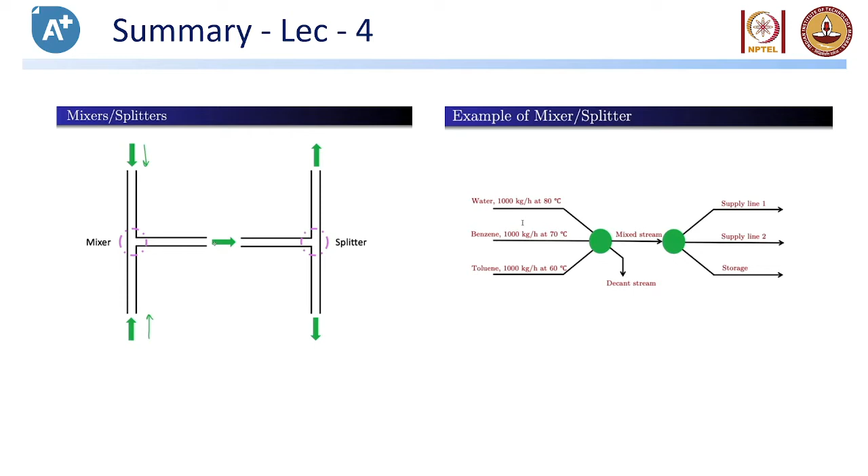So we'll go in details when we talk about thermodynamics of reactors, right? And the next example which the professor discussed is about flash. So we can discuss one more example over here. In the case where the professor explained the flash calculations, he took the example of naphthalene, toluene and water, right? So we'll just simplify it.

So if I have a binary system, let's say a mixture of nitrogen and oxygen, it's a simple example, right? Air, neglecting argon. So if I take a nitrogen and oxygen 50-50% feed, and I'm sending it to a flash splitter at, let's say, 100 Kelvin and 10 bar, what composition would you expect to be in the vapor phase and liquid phase?

Will it be the same composition as the feed? Let's talk with respect to nitrogen. In the feed I'm saying nitrogen is 50%. Now what is the composition of nitrogen in vapor? Will it be more than 50%, less than 50%, or equal to 50%? I'm doing a flash calculation at 100 Kelvin and 10 bar. I took it as an example. All right. So any response?

Could you get the question? First asking before asking the answer. All of you, could you understand the question, or shall I repeat it? Yes, okay. See, I have a feed which has a mixture of nitrogen and oxygen. My feed composition is 50% nitrogen and 50% oxygen. Now I'm saying this feed is at 100 Kelvin and 10 bar.

Any response? The vapor phase is at which pressure? Okay, we are neglecting the pressure drop in the flash column. For example, the feed is at 10 bar, and I want the vapor also at 10 bar. Or let's say we are expanding it and then separating it. Vapor is at 1 bar and my feed is at 10 bar.

So one response says it depends on the K values of O2 and N2. Yes, that's a good response. Less than 50%. Okay. So could you please explain how you are guessing that it's less than 50%, Mr. Akshay? Or the people who said it's higher, just out of curiosity, how could you tell straight away? Because one of your friends says it depends on K values of O2 and N2. So irrespective of the K value, how could you just say that?

Another person says it depends on how much pressure we want. If you're talking about pressure, it's an indirect way of mentioning the equilibrium constant. Both are related, so it's indirectly the same response. Okay, bubble point of nitrogen. See, when you're talking about a pure fluid, you call it boiling point. There's no bubble point and dew point for a pure fluid. When you're talking about a mixture, you get a bubble point and dew point. So for nitrogen, you can say boiling point, not bubble point.

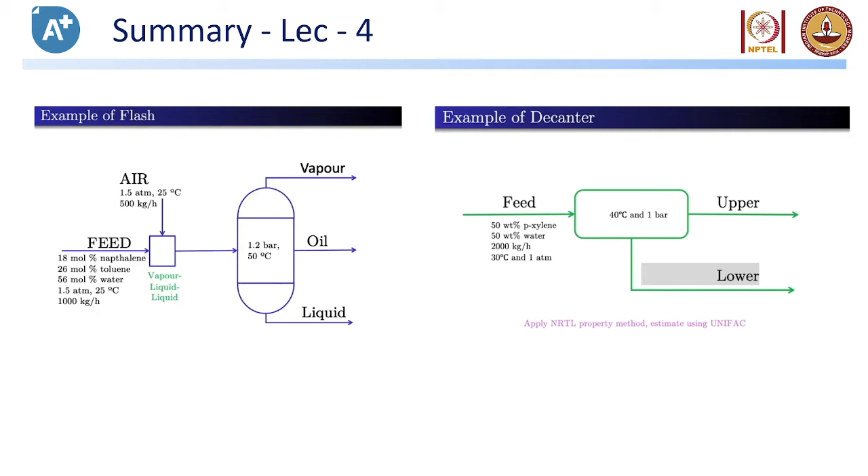Now the fourth one which the professor explained is the decanter. A decanter is basically used for separating an LLE split. If you have a liquid split, then a decanter is usually used. It's the same as the flash separator. In flash you have VLE, whereas in decanter you have LLE. It's the same thing. Thermodynamics remains the same.

Next he explained about the heat exchanger, a simple heater, cooler, and a combination of both. And then he came to the multi-stream heat exchanger. These multi-stream heat exchangers are quite used in the LNG process. So what is the difference between a simple heat exchanger and MHeatX? In a multi-stream heat exchanger, you have multiple cold and hot streams, so it can accommodate n number of hot streams and n number of cold streams. As we progress in this course, we'll solve a lot of optimization problems and process design with respect to multi-stream heat exchangers, and we'll discuss more about pinch analysis in future.

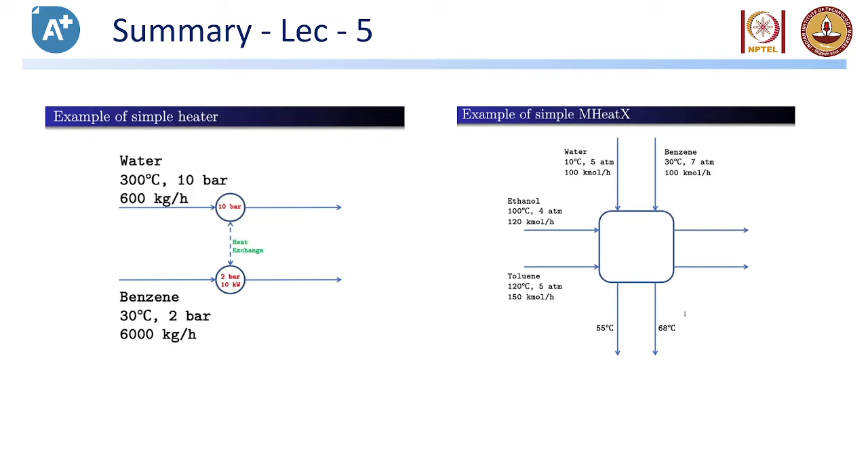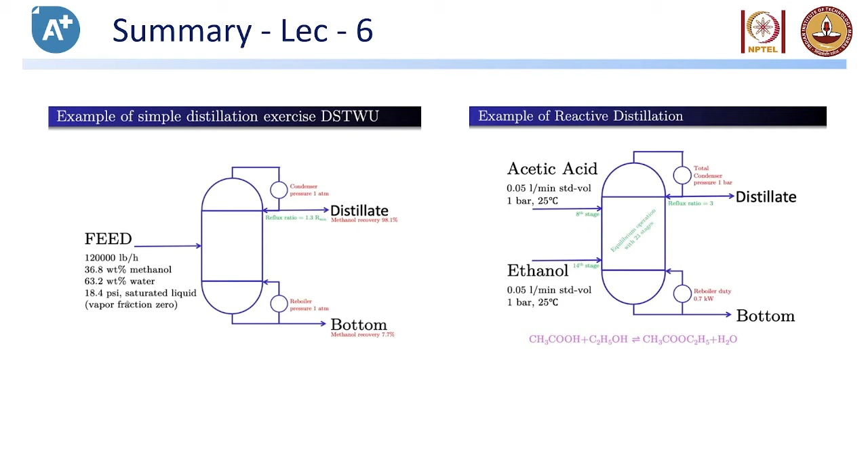Then he discussed different types of distillation columns available in Aspen, starting from a basic approximate model to a better version with better prediction of results. Different kinds of distillation columns were explained in the slides. Then absorption columns and extraction columns were explained. So till here, is everything clear, or do you have any questions to be discussed?

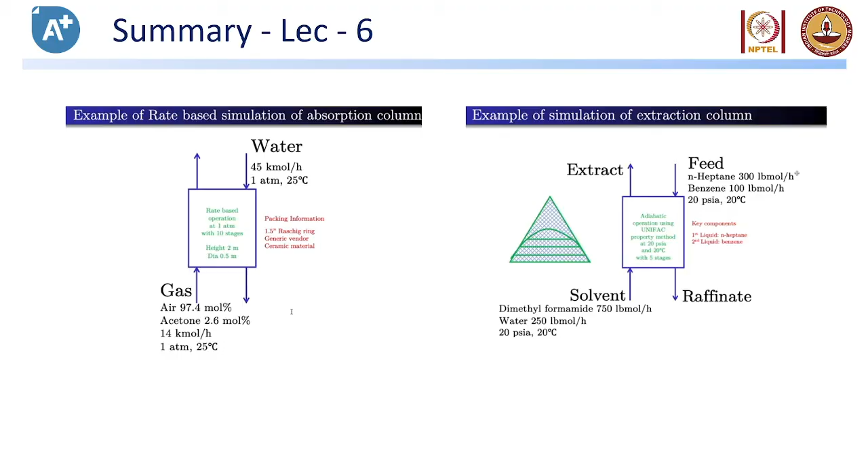Any questions? No, sir. No, right? That's great. Okay, so I have a few questions for you. In between I'll keep on asking if anything needs to be discussed, so please respond. We'll add a few more points.

So this is the question for you. If there are two outlet streams for a mixer block... whatever we discussed previously, we observed that for a mixer we have only one outlet, right? So what is the second outlet with respect to Aspen? This question is very specific to our Aspen software. If you know the answer, you can just put it in the chat box.

I know that people are very much into Aspen and know all the answers, but let others also think. Give others the time. If you already know the answer, just put it in the chat box. Let others think and answer.

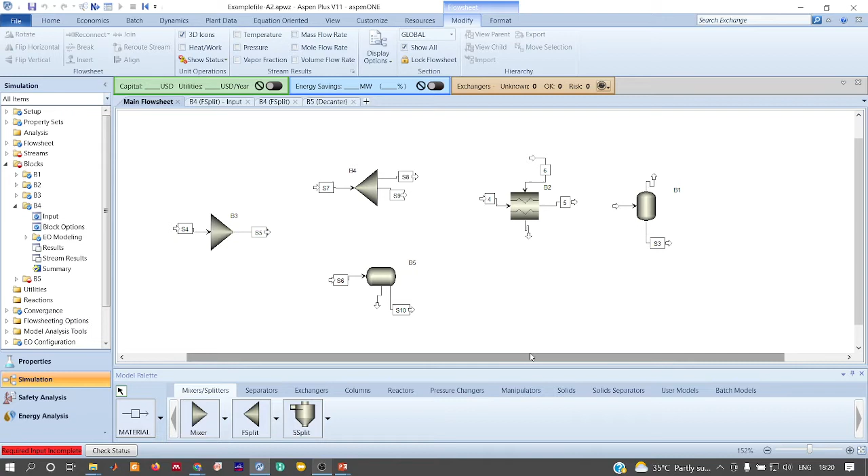For the people who didn't see it in Aspen, I'll just show it. So I'll create some more. We are talking about the mixer, right? I'll create a new one. See, when you go to the model palette, you'll have a mixer here. Just put it up.

So I already gave two inlets and one outlet. Do you see this? So we have the second one over here, right? This is what the question is. So if you just go over it, you will be able to see that water decant for free water thing. Okay, so this is what the question has been asked.

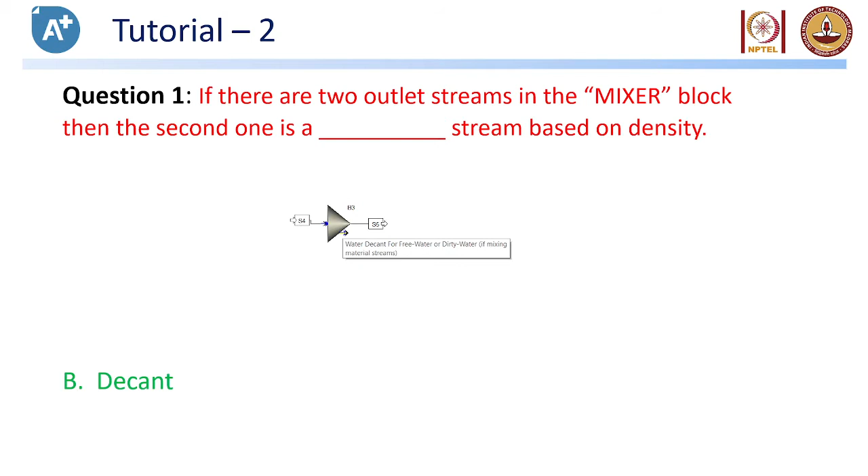All right. Yes, I think a good number of students have answered. Thanks for your response. Yeah, this is the answer, right? Now specifications based on... I'll just post this in this query. Okay, not query, polls.

Okay, so this is one more question. So now we are discussing with respect to split. So in Aspen, what are the inputs that are required for completely specifying the split block? For the people who have already used Aspen, they will be able to answer, and those who don't have access at this moment, just follow my screen. Okay. Please do respond on the poll so that I'll have a quantitative analysis.

So out of 49 students, only 13 have answered. For others, this question seems very poor, is it? Yes, if you have any queries, you can just put it in the chat box.

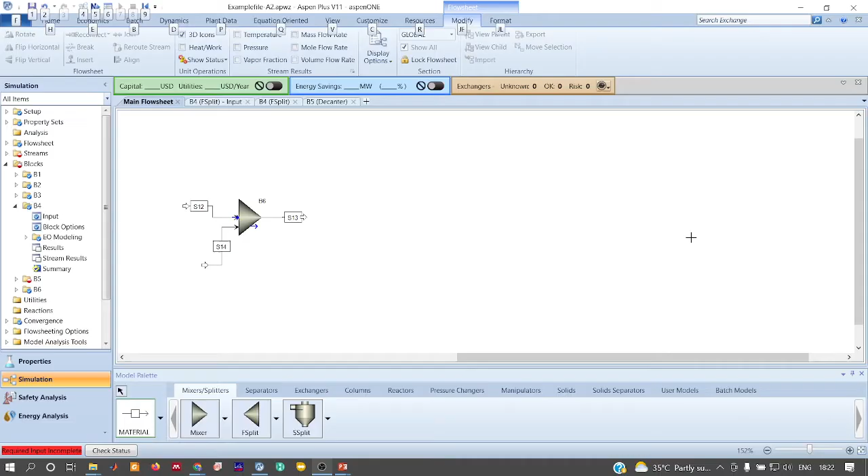Okay, let's see this one. So I have a split. See, this is the one which we are talking about, splitting. Okay. So I gave one inlet and two outlets, right? So if you're going to split, you'll be able to see the split fraction. So what fraction of the inlet would you like to give to stream 16? Another one which you have is the flow. Okay. So you can also specify flow, you can also specify limit flow, multiple possible values.

But essentially, one needs to understand that for solving any block, the number of degrees of freedom is really important. So in case of a splitter, just take a simple example. If my inlet flow rate is 10 grams per second, and I already specify that one of the stream flow rates is 2 grams per second, then the second stream flow rate will automatically get fixed, right? When I put a control volume here and put a mass balance, the second stream flow rate will automatically get fixed. So one needs to understand the degree of freedom available with the individual block or unit very clearly.

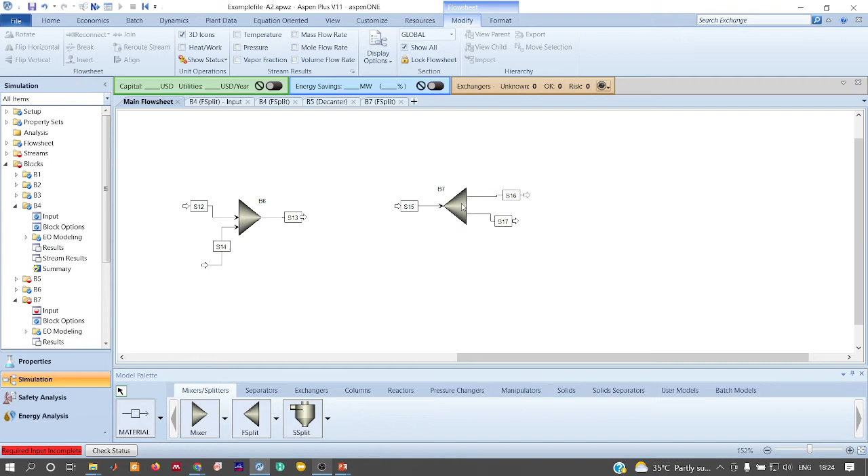Without understanding it, if you just keep on giving the input to the system and ask it to solve, it won't happen. It won't be able to solve. It can happen that it is under specified or over specified. Unless you give the completely required inputs to make the degree of freedom available with the system 0, you won't be able to get an appropriate solution. Okay, so in this case, you have a degree of freedom of only one, so you can specify only one. Okay, no more than that. So this question has multiple answers. Okay, so the people who have put B and D, I think you have already gone through it. Okay, fine.

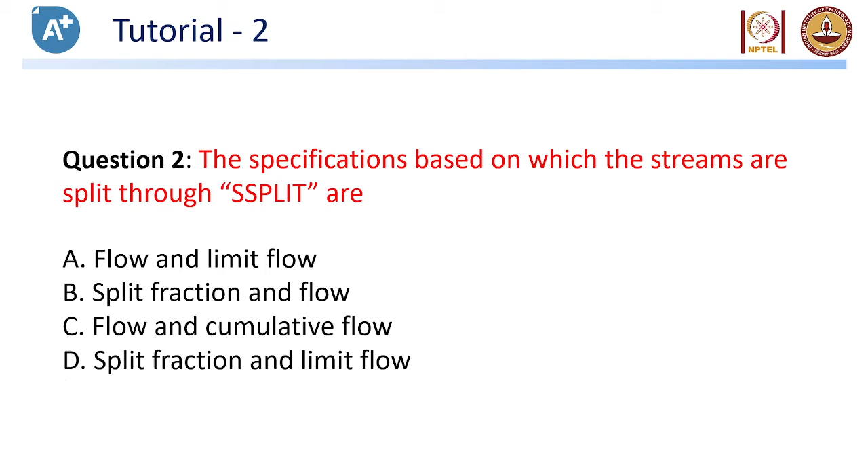Okay, so see, this is one of the flow sheets. Now we are filling data to the stream. Okay, so we have the S3 stream, we fill temperature, pressure, and flow rate, compositions and all. Now I want you to answer what all the things you can get when you go through dropdown A. If you have Aspen in front of you, can you just open it and check the composition part? What all things can you give?

See, this is a very simple one. Okay, this question is framed for you to just get used to things and get aware of what all things are available in Aspen, what all things you can give. That's the reason this question is framed. Okay, it's very simple. If you have Aspen in front of you, can you just go through it and see what all things are available to you?

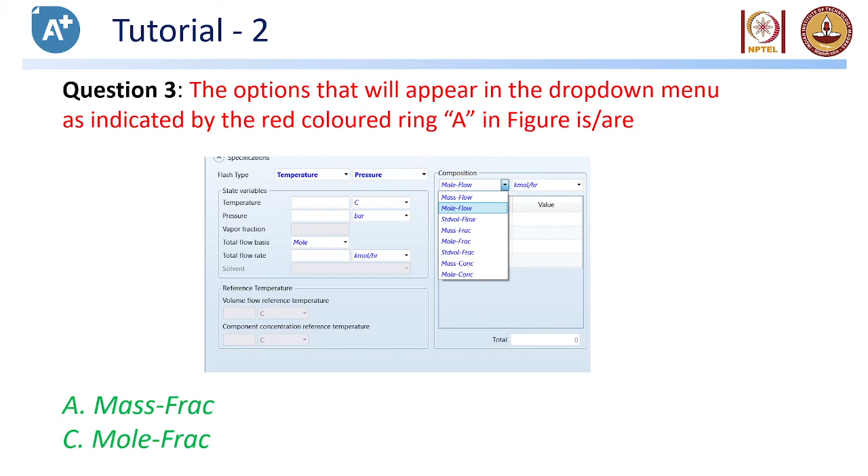Okay, I think this is a very simple question. Let's skip this one as well. So can you answer question 7? The type of separator model used for separation of liquid phases. So before answering this question, what is this liquid split? Any response?

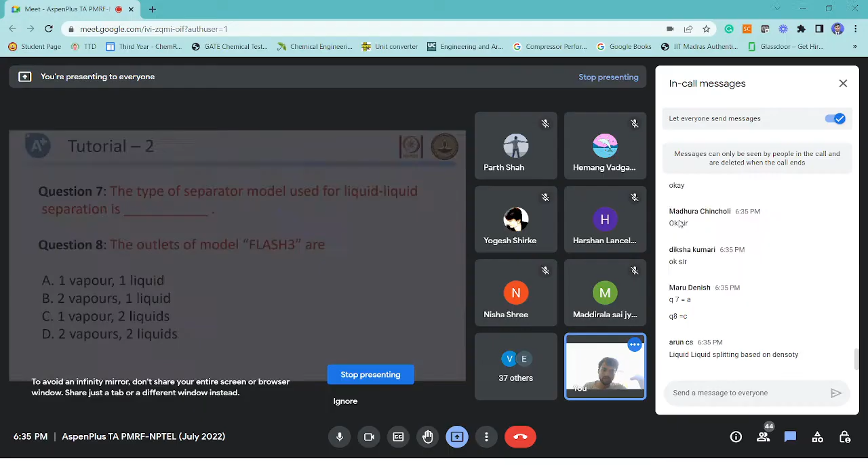See, I'm not asking you the answer for these two questions. I'm asking you, what is liquid-liquid split? Why does it happen? What is the reason for liquid-liquid split? Or can you give me just a practical example, a simple example, based on density difference, boiling point, oil and water, density difference. Okay, so

With the knowledge you have, you are just telling it's based on density, right? You say, let's take an example of oil and water. That's the simplest example where you can see different liquid layers separation, but this is based on density. That's what you say. I would call it, this happens because of minimization of Gibbs free energy. There is something called a stability analysis of the phase. When you do flash calculations, you'll always check multiple feasibility of phases.

Okay, so has anybody encountered this term called minimization of Gibbs free energy? Anyone from thermodynamics? Okay, no. Any other response? What is Gibbs free energy? What is minimization of Gibbs free energy?

See, when you call a system stable and at equilibrium, what happens is your Gibbs free energy of the system is minimized. Okay, so for the given system, let's say we have two phases, vapor liquid, I calculate Gibbs free energy to be some value G1. In another case, I consider three phases at same temperature and pressure, same conditions basically. Now in these phases, I consider vapor, liquid, liquid. For this particular condition, I calculate a Gibbs free energy called G2.

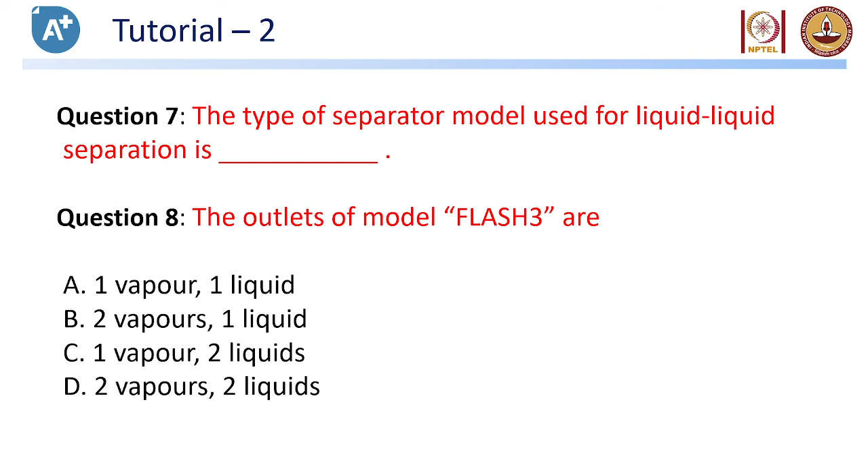All right. And yeah, in the eighth question, I think some of you have already answered this, right? Okay. Okay, fine. Yes. So in the separator module, which is this question? Okay, I think this is straightforward. Just leave it. Okay, so here we have the 10th question.

So we have two different distillation blocks. When I call it by its full form, you'll automatically have the answer. So two different distillation columns are useful for obtaining column parameters and provide accurate results. The statement, is it true or false? So the professor explained about different distillation columns, right? So among all distillation columns, let me just post it on the poll.

Yeah, this one. So now I am claiming that DSTWU, or distillation shortcut columns, provide me column parameters as well as provide accurate results. So is this statement true or false? If it is true, can you please comment about why you are calling it true, or if it is false, can you please comment why it is false, or based on what knowledge you are telling it to be false? Any other responses?

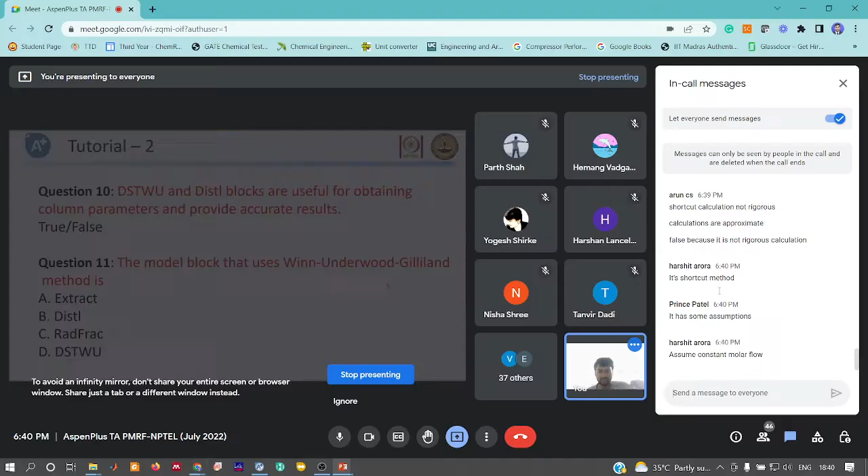This happened with me when I went to an interview. I just randomly told it does some calculation. So they pointed out to me, what is that some? You should tell clearly what is that some.

See, one says molar flow, one says molar overflow, relative volatility. Okay, there are multiple answers. We'll do one thing. We'll keep this question. I want you to read and come back for the next class, because I'm getting multiple answers. If I keep on telling everything, then you don't get to learn. You just keep on hearing. I want you people to answer this.

What is the difference between a rigorous model and the one which is called an approximate model in Aspen? What is the big difference? Okay, I think the 11th question would answer a part of that question. So just post a poll for the 11th one. Okay, so the model that uses the Underwood method is what? One of the models in Aspen distillation simulation uses the Underwood method. All right. So which among these uses the Underwood one?

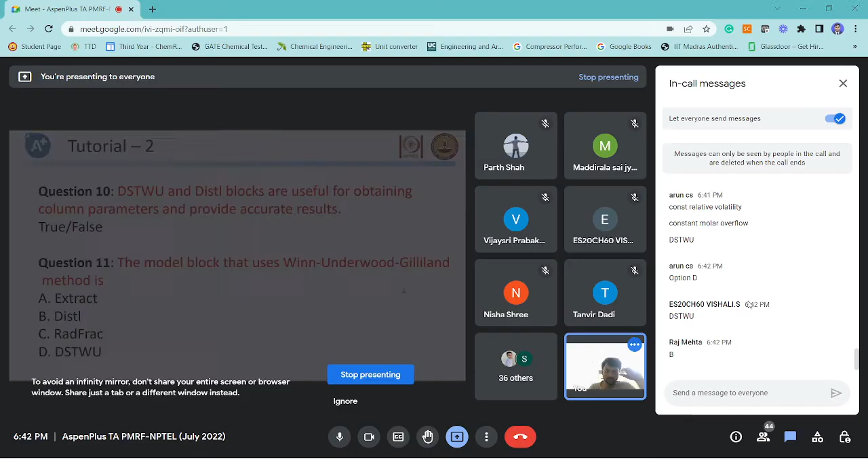Okay, fine. So yes, as I discussed, there are two different kinds of models in Aspen. One is the approximate model for distillation, and another one is the accurate model for distillation. We'll take up a crude oil distillation example in future. This problem, the data which we are going to simulate, is actually from a refinery. So in future we'll be clearly differentiating these two and discussing more in detail.

That time, what I'll be expecting from you people, I want you to do a simulation and give me results. So by then all of you should have Aspen with you. That's how our further sessions are going to be held. I'll be giving you a problem statement and wanting you to respond. I'll be giving the steps to do while simulating or optimizing according to the problem statement, and I'll want you to give responses step after step. So we'll discuss more about distillation columns in future classes.

And yes, I want you to answer the difference between the simple approximate model and the rigorous model available in Aspen. No, you need not respond at this moment. You just go read about it and come back. Don't blindly come back, okay? Because I could see there is a wide range of answers over here.

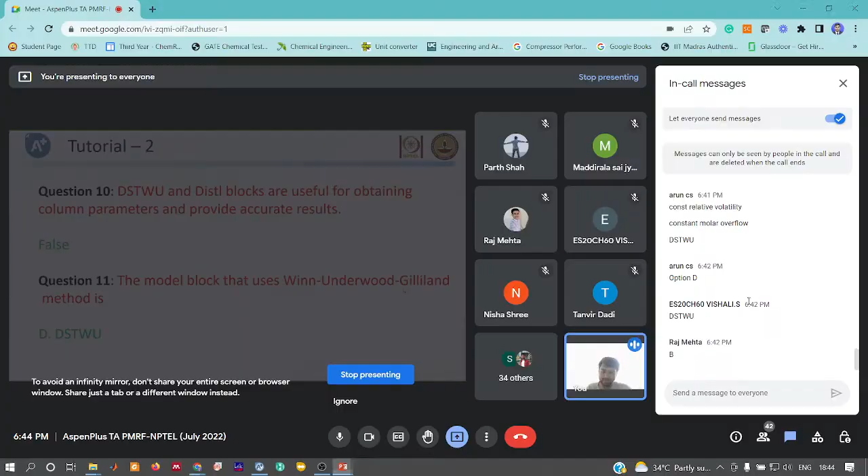One says molar, one says molar. No, there is a difference between the two, right? So relative volatility. No, this is just a wide domain. There's hardly any connection between these two. Till now, whatever answers I could see, I could see some thermodynamic connection, but the responses I got now are like an open domain. So I want you to think over it, read over it, and come back. Then we'll discuss this in the next class.

Okay. Yes. So there's one more question. The type of distillation which we can't perform in the RadFrac model in Aspen. Which among these can't be performed in Aspen? I'll just raise a poll for this as well. Give me a second. So yes, can you please respond? The type of distillation which you can't perform using RadFrac. And also give me a reason. For example, if someone says you can't model azeotropic distillation in RadFrac, also just comment why you can't do it. That will be useful, right?

Because just putting a tick mark for one of the options doesn't make any sense. You should know why you are doing it. So in these classes we will be explaining more, answering more about the why question, not about what. So I want you to answer why. For example, if someone says extractive distillation can't be performed, why can't it be performed? What is the reason? If we do something, can it be performed? All these questions should be answered, right?

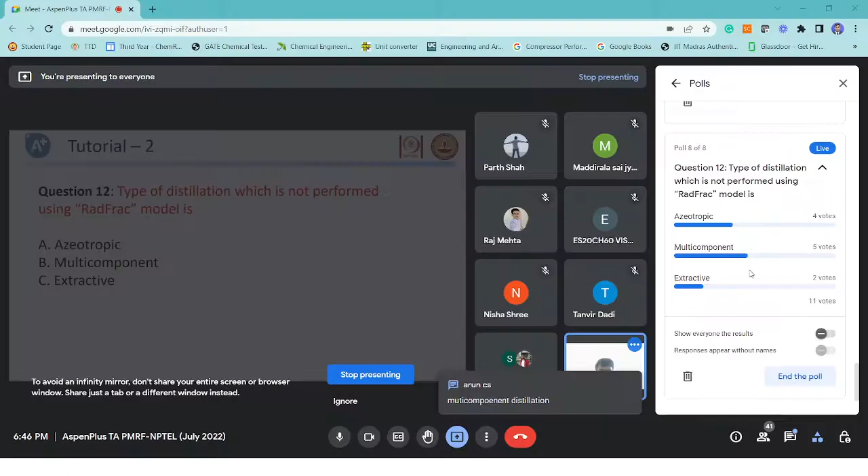So one says multi-component distillation cannot be performed in RadFrac. Can you please respond why it can't be performed? Some people have responded regarding azeotropic distillation, and some of you have answered that extractive distillation cannot be performed. So in all these three cases, can you please also comment why you think it can't be performed in Aspen? Any responses?

Okay. Okay. Due to solution temperature. What is the solution temperature? Take me as a layman person and can you please explain what is the solution temperature?

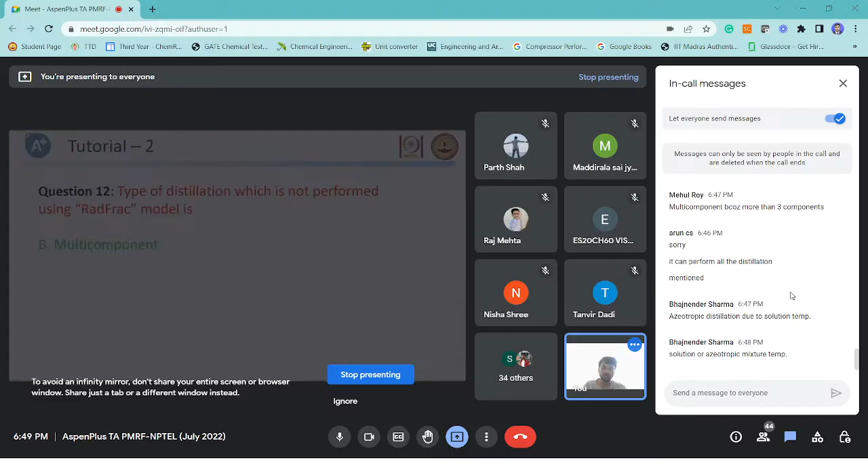Okay, yes. Any questions you want me to discuss today? Anyone, any questions? Yes, regarding software, I still don't have a proper answer for that. I have requested the coordinator for that. I'm yet to. Okay, you want me to explain about inversion temperature? Okay, I'll explain. Any other questions? The schedule is actually fixed long back. Okay, let me come one after another.

So see, there is something called the Joule-Thomson coefficient. This Joule-Thomson coefficient is proportional to ∂T/∂P, not exactly, but essentially a change in temperature with respect to change in pressure. At the inversion point, the Joule-Thomson coefficient becomes 0. So there is no change in temperature with respect to change in pressure.

So if I'm decreasing the pressure of a gas, let's say from 10 bar to 1 bar, at that particular point my temperature change will always be 0, because I'm expanding it at inversion temperature. Now if I'm expanding it at higher temperature, when I'm decreasing the pressure, my temperature increases. The other way around, when I'm below the inversion temperature, expanding from high pressure to low pressure, there will always be a drop.

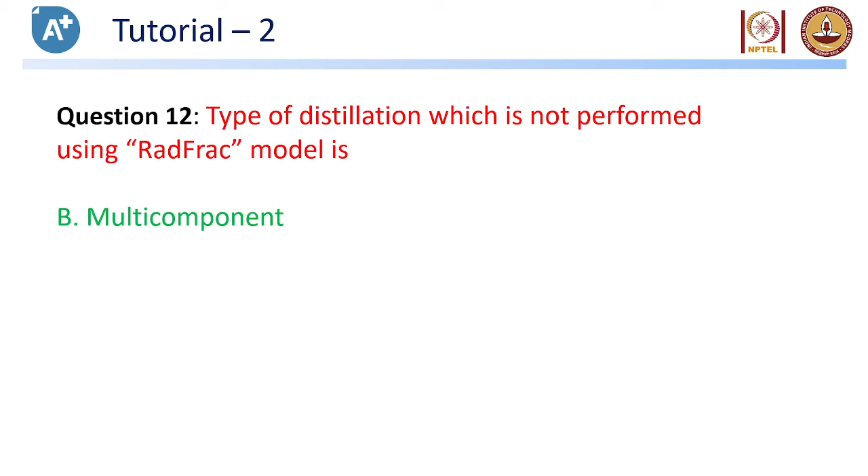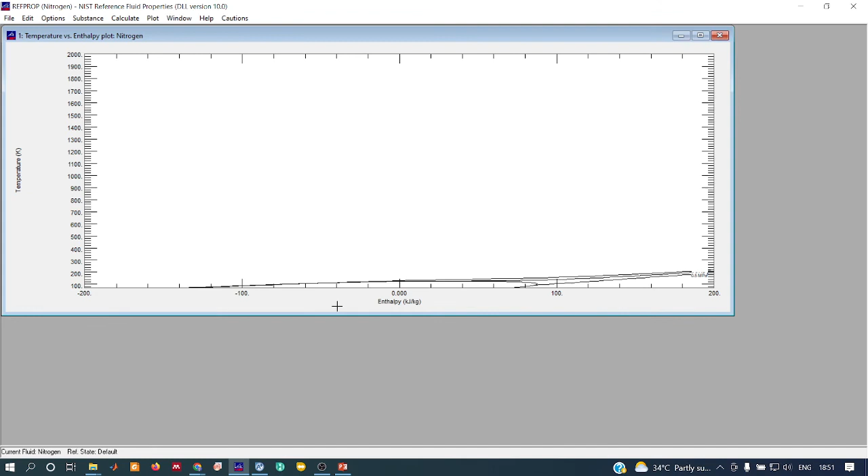Okay, fine. See, these are called constant pressure lines. On the y-axis we have temperature, on the x-axis we have enthalpy. When we are expanding through a throttle valve, it happens at constant enthalpy, isoenthalpic expansion basically. So this is 6.5 megapascal and 3.5 megapascal, which is essentially 65 bar and 35 bar.

Now if I'm at this state point and decreasing the pressure, we are expanding through a throttle at constant enthalpy, right? So my isoenthalpic expansion causes a drop in temperature. Whereas if I'm above inversion temperature, it happens the other way around. Basically these constant pressure lines will cross each other at some point. The crossing point is called the inversion temperature. So that's what inversion temperature means.

Yes, expansion through a valve is related to the Joule-Thomson coefficient, correct?

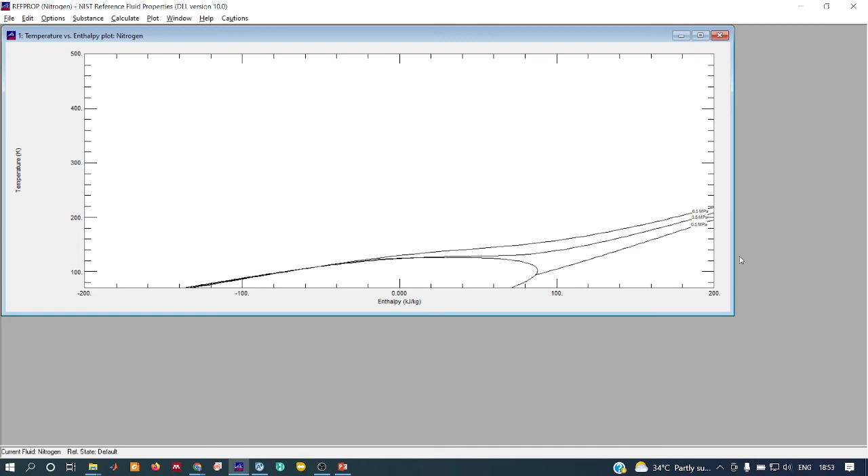Why are we using water free method? A free water method. See, if someone says that you can get pure water, then he is actually trying to make you fool. You can never get pure water. Okay, it's not possible. In practical, we say that pH of water is 7, right? How many of you have actually tried to measure pH of water?

Although you get a distilled water, the pH would never remain neutral. Okay, because getting pure water is just not possible. However, in simulation point of view, we say water is just H2O and there is no ion, solvent, nothing in water. Okay, so to simplify the analysis, we use free water method. Okay, that's the reason.